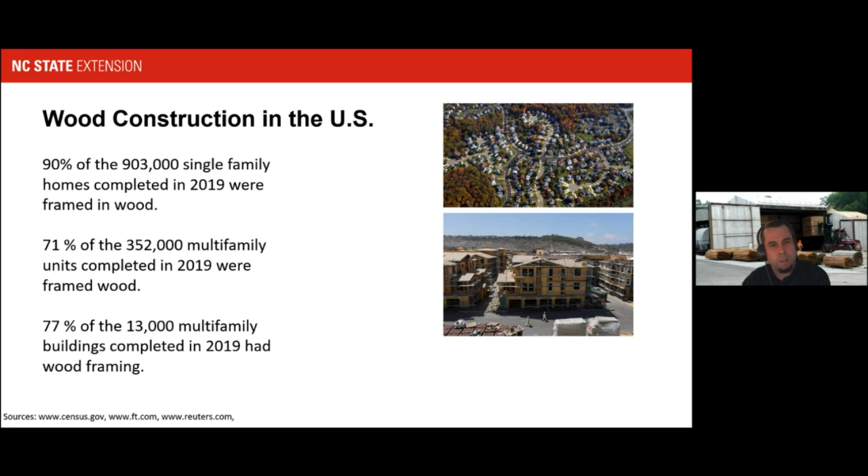It originates actually from the timber frame construction that was done in the old days. Post and beam uses larger pieces of wood, solid wood; some engineered wood products can be used as well. And it's primarily used for upscale buildings. In recent years, it became really popular with small to mid-sized commercial construction. If you take the two, light wood frame and post and beam, and combine them, you get to mass timber. And what that is, well, let's take a closer look.

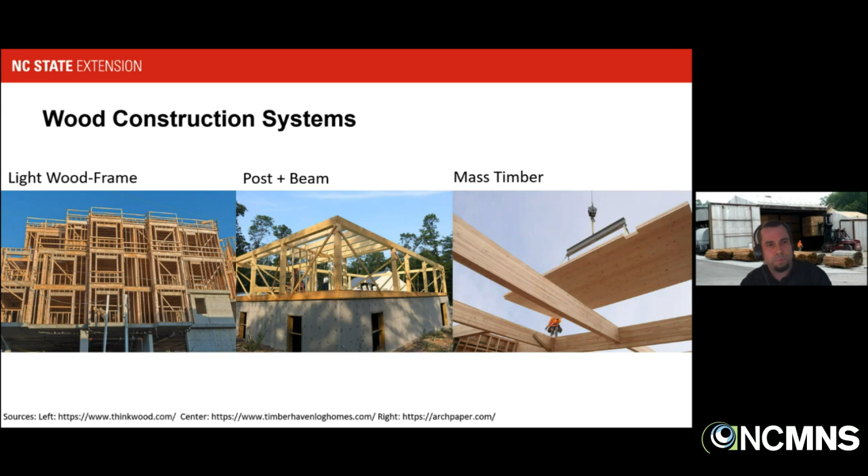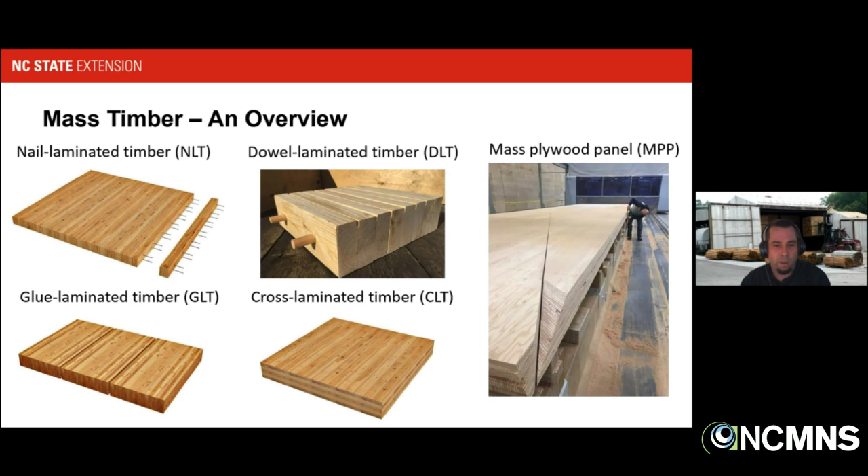We then take this dimension lumber, we combine it to layers, and then we take these layers and put them onto each other, alternating the direction of each layer by 90 degrees. And eventually, we get a panel that can be between 8 to 12 feet wide, 20 to 60 feet long, and 3.5 to 9 inches thick.

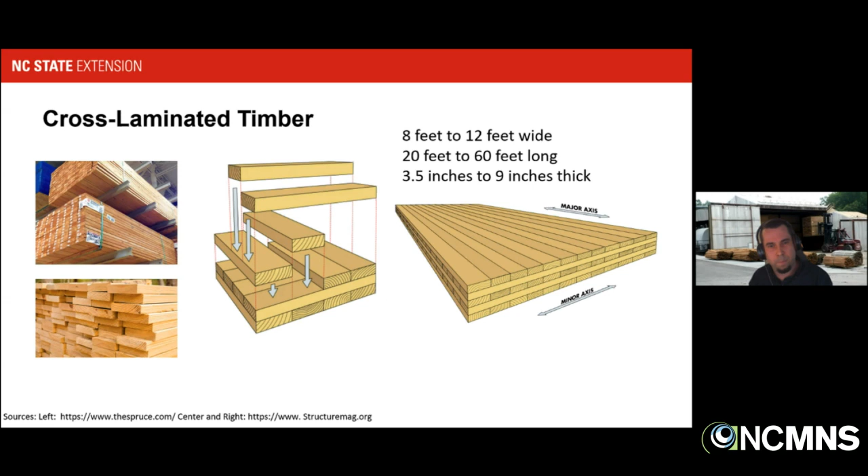But before this panel leaves our factory, we can do something else. There's an additional step. How about cutting openings for doors and windows into those panels? Or maybe an opening for wiring or plumbing or something like that. When that is done, we put the panels on a truck, bring them to the construction site, and with just a few people and a crane, we can immediately start setting up the building. Construction is quick and fairly easy to facilitate.

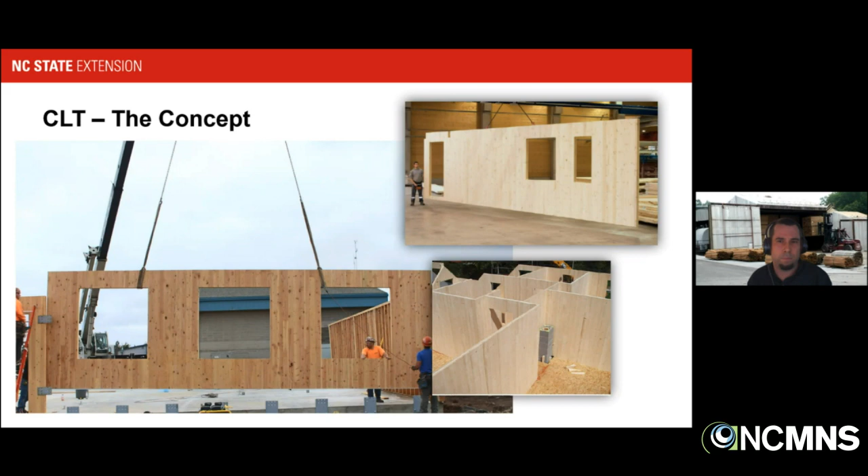So, mass timber, CLT, was made in Central Europe in the 1990s. Austria, Germany, and Switzerland. In the area of these countries is the origin of CLT. And the idea at that time was to really find a more efficient use for small pieces of wood, side products from the sawmill industry. And those low-value components were combined into a large panel to gain additional value.

First accreditation for CLT was given to KLH Massivholz in Austria, and Merk Holzbau in Germany. And today, the largest manufacturers for CLT in Austria are actually Stora Enso, a company with headquarters in Finland,

And I have to mention that here because our department head is from Finland and he's probably watching.

Binderholz and KLH Massivholz. A fun fact about KLH: you would typically think that these three letters stand for some kind of a family name or so, but it's actually the Austrian equivalent to CLT. KLH stands for Kreuzlagenholz, cross-laminated timber, CLT.

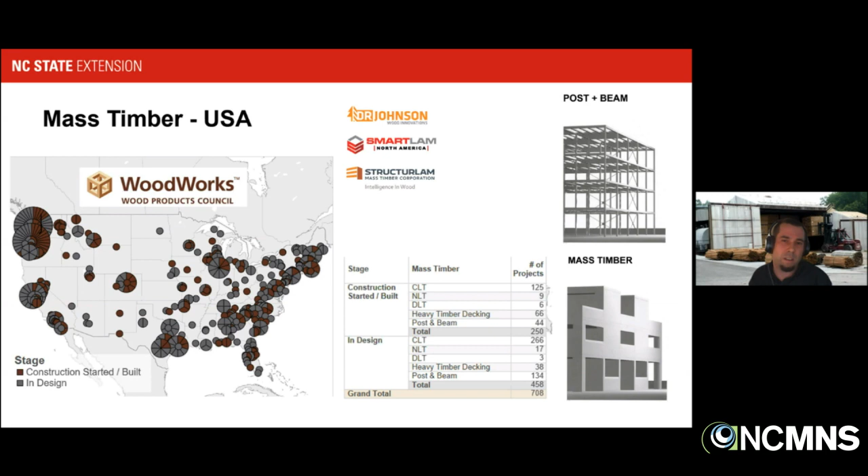So why all this? Why mass timber? Well, there are a couple of reasons. Let's look at the environmental side. Wood is a low carbon alternative to steel and concrete. There's something called carbon sequestration, we'll look at that in a second, and it's a renewable resource. On the economic side, that's also an interesting aspect. So the financial aspects, or the necessary investment to set up a CLT construction is actually moderate.

And since it uses the existing industries of dimensional lumber, we should be able to tie a CLT industry directly into this existing dimensional lumber industry in many of the villages and towns and places across the United States. On the construction side, reduced labor costs. We don't need many people on the construction side. Everything is pre-manufactured, so we can set up the building quickly and we don't lose a lot of time.

There's also a high compatibility with traditional and innovative construction systems. And well, I'm a wood guy, but honestly, I'm a fan of hybrid construction. I like to use concrete and steel and combine them with wood to achieve the best result possible and use each of the materials to their advantage. Wood is perceived as healthy, and it's appealing, it's innovative, and eventually indoor emissions, that's an important topic. Using wood, we can really keep those under control and be in compliance with emission goals.

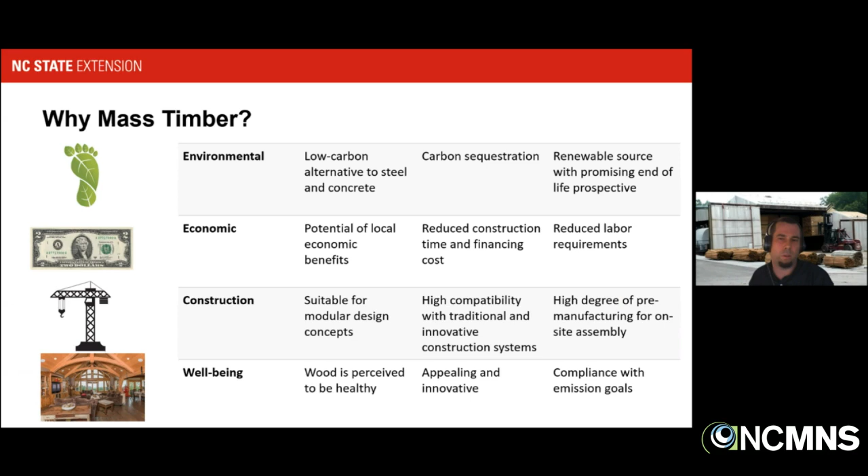Let's take a look at the carbon release and carbon sequestration. The idea is that as a tree grows, it absorbs CO2 from the atmosphere and stores it as carbon in the wood. This is an important topic today as we are looking at climate change and increasing levels of CO2 in our atmosphere. So the tree grows, it reaches a certain age, we harvest the tree, we turn the wood into a product, we go to a construction site and we build some type of a building.

We use the building for, let's say, 50 years, and then we take down the building, we dispose of the wood, it will decay, it will deteriorate, maybe we convert it to energy, so we burn it, and all of that carbon that was initially sequestered is returned back to the atmosphere. I know this sounds really nice, it's a nice story, but it's only half of the truth, and there's a little bit more to it.

On the emission side, it's not just the wood. There are potential emissions during harvesting, during production, even the construction phase. Maybe we burn some gas to run a chainsaw, run a machine or something like that. Then the use phase of the building. The use phase of a building is known to create a lot of emissions. And depending on the type of product we use, we might have advantages or disadvantages in terms of energy use and emissions.

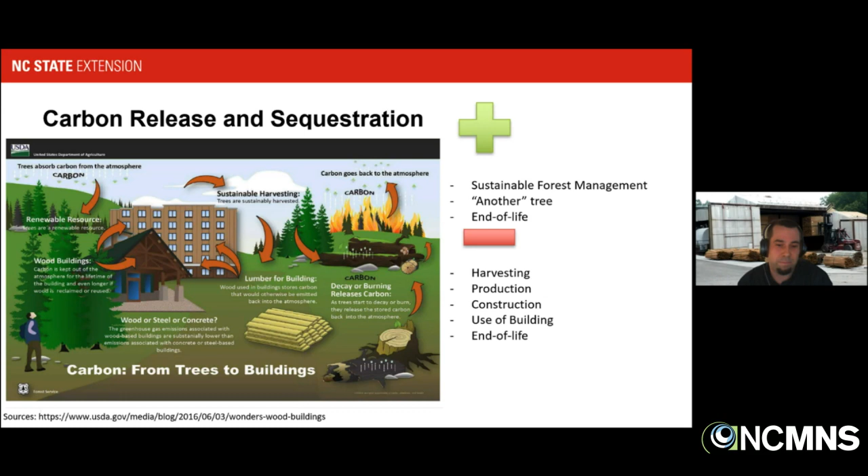So let's finally take a look at a tall wood building. Albina Yard and Framework in Portland, Oregon. It's the first commercial building to use domestic CLT, completed in 2016, 4 stories, 16,000 square feet. It was built in a very tight neighborhood of Portland, small roads, many buildings, and just using a crane and a truck, they were really efficiently able to quickly finish this building.

What I like about this building, when I read about it, is actually a comment from one of the architects. If you want to prepare a great meal, you use what is local or what is in season. It's not just about what you want to create. It's about what's actually available to you and how you turn that into a transformative experience. What if we, here in North Carolina, for example, were able to use the resources in our backyard and put together a project like this? Wouldn't that be great? I think in today's time, this has a lot of value.

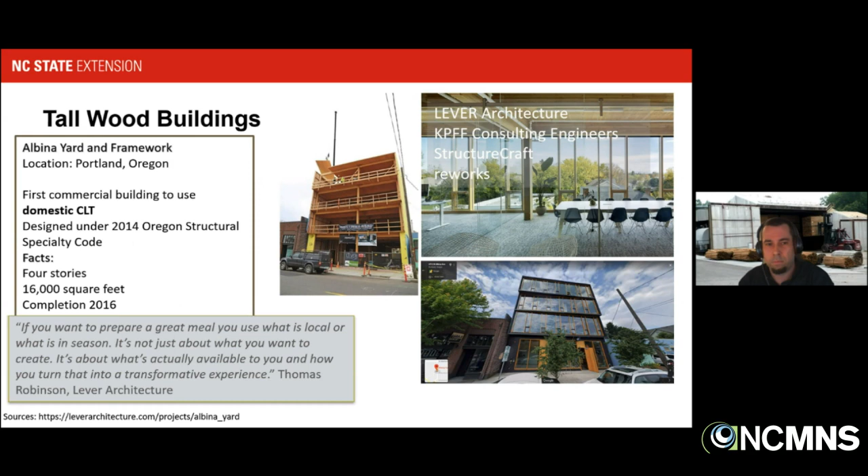This is a tall wood building. Well, here's one a little taller. University of Arkansas, Adohi Hall, the Cherokee word for woods. They claim it's the largest CLT building in the United States. It's their sustainable way of re-imagining campus housing in contrast to traditional housing. And I think it's a great example of a dorm. It's very attractive.

5 stories, 202,000 square feet, 708 beds. It used 3,200 cubic meters of CLT and about 1,100 cubic meters of GLT. And I think they found a really good solution to create a dorm that is appealing and attractive to students. If you look at the bottom image, isn't it great how they combined wood with other materials to create this type of a learning and living environment? I think I would like to be a student there. That would be a nice thing.

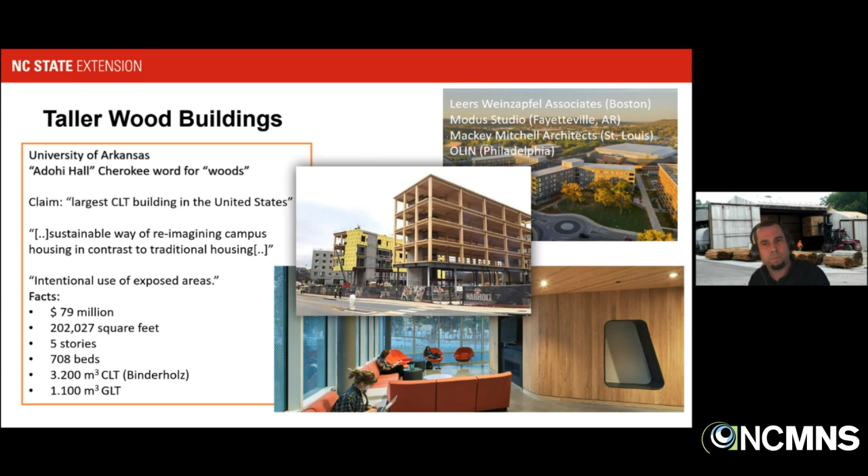Well, this is a taller wood building. Let's make it a little taller. UBC Brock Commons. It was the planet's tallest wood building for 1 year. The University of British Columbia set up this building, I think in 2017, yes, the August of 2017. And after all of the components were pre-manufactured, it only took 70 days of assembly to finish the building. It's built on a concrete podium, and it has 2 concrete staircases. You can see them on the top image. One of them is right next to the crane. It has space for 404 students, single bed to 4-bed apartments.

And one thing I really like about this project, if you look at the bottom image, you can see the floors are made out of CLT, the columns are made out of glue laminated timber, and then they have these elements there with the window in it. All of them were pre-manufactured, brought to the construction site, and then mounted. And now think ahead, maybe 20 or 30 years. In 20 years, maybe we have better windows, better insulation, maybe we have other standards regarding energy efficiency. So we can replace those. We can take out the old window elements, put new ones in, and extend the lifetime of the building by maybe another 20, 30, 40 years. I think that's a really, really interesting approach.

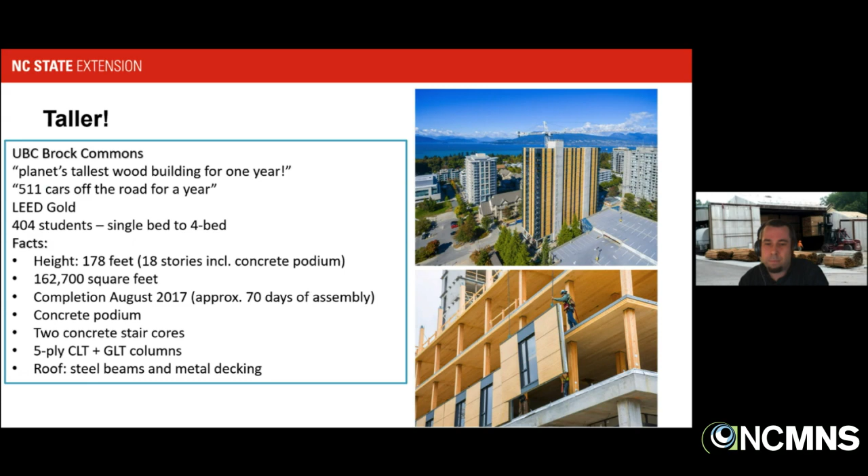18 stories. Well, what do you think about fire? Could that be a problem? I know at least tonight's viewers from Raleigh have some experience there when in 2017, the Metropolitan apartment complex in downtown Raleigh caught fire. I looked at some photos, I read a few articles, and that was really impressive and amazing, and not really nice to see. But the fire department made an important comment in the news articles. This was a construction site. And there's this short period of time, 2, 3, 4 weeks, when all of the things we can do to make a wooden building fire safe were not in place.

The IBC, the International Building Code, basically has 3 factors or criteria for fire resistance. One is the structural resistance. It's the duration the assembly can support its load during a fire event.

We want to have enough time to get everybody safely out of the building. Then there's integrity, whether the assembly can prevent the spread of high heat, flames and gases. If there's a fire, we want the fire to be contained in a limited area, so the fire department can efficiently take care of it.

Then insulation: prevent temperatures on surfaces not directly exposed to flames from rising above pre-fire temperature. To light wood on fire, you don't need a flame. A high enough temperature is enough. Interestingly, thick pieces of wood, so mass timber, show an interesting behavior. In a fire, the char forms on mass timber at a predictable rate, slowing combustion while retaining strength and allowing time to evacuate the building.

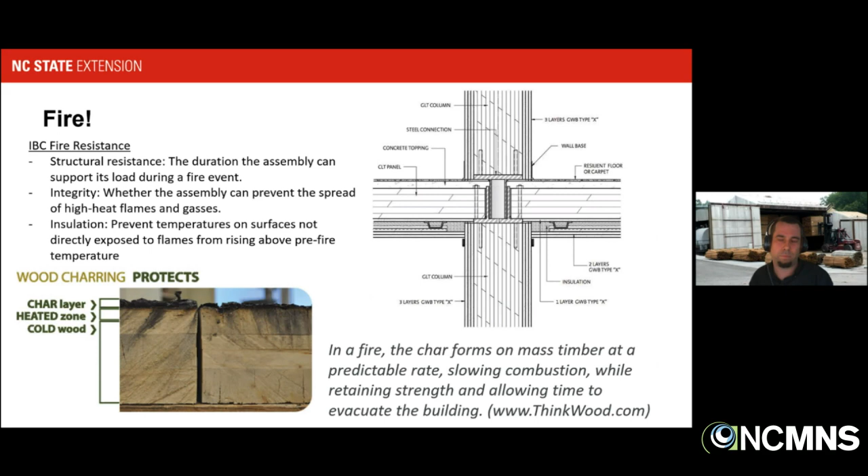Next time you go online and look for mass timber or cross-laminated timber, you might come across something like this. I call them tall visions. One example is the Canada Earth Tower. It's the idea of creating the world's tallest hybrid wood tower in Vancouver, BC. 40 stories, 339,000 square feet, 200 residential units. The idea is to create it with a concrete core and the rest is wood. They aim at achieving passive house certification, a standard to keep energy consumption really low. Zero carbon is another approach there.

One of the things they have included, you can see at the bottom, is these interconnected social spaces that offer an immediate connection with nature in clusters of 12 to 18 households. So a lot of functionality there, a lot of ideas. The question with all these visions is, what is the rate of diffusion from a vision to a real project? There are quite a few projects online that have been stopped or never started. But maybe in 10 or 20 years, we'll see something like this in reality. And I'm really excited to see that happen.

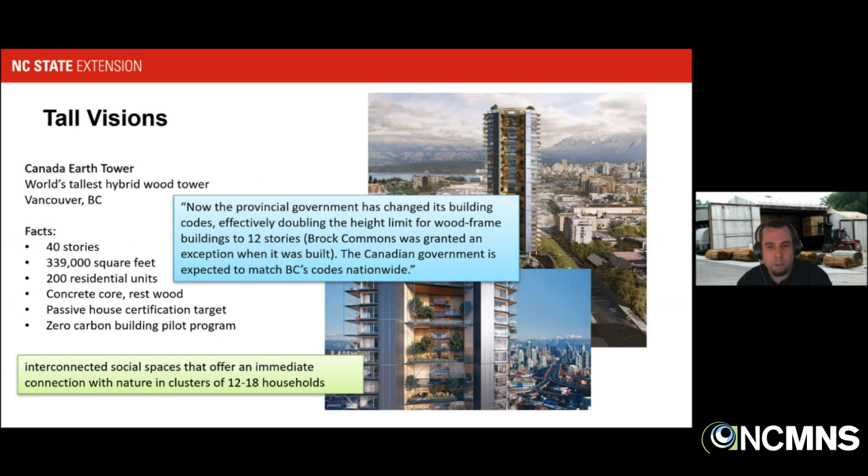Enough about visions. We at NC State Wood Products Extension decided to do something with CLT. We are working on a project funded by the US Forest Service Wood Innovations Program, developing cross-laminated timber panels for residential and smaller commercial construction. To make these panels, we use the type of cold press used in our former furniture industry, so we can reuse these presses and use an existing resource. The wood we use is southern pine, which grows in our backyard. And we make small panels, 4 by 8 feet.

We have partnered with a big number of companies all across North Carolina, and this is an ongoing project. I'm really excited to get back to campus soon and see our new press, the red one in the center. It was delivered about 1 or 2 months ago. I've never had a chance to see it, but hopefully by August we'll have a chance to make some CLT.